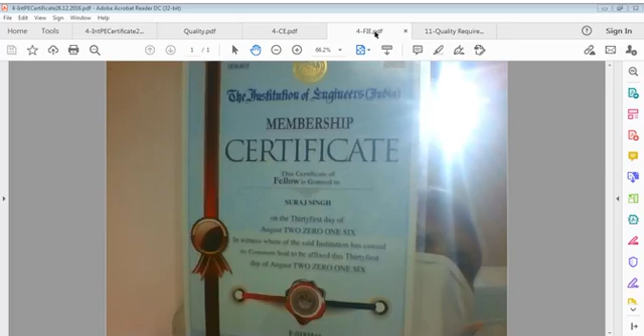So we have to refer again to these certificates, to certifications which are very important. These certificates tell something which you must comply by. You must prove that these certificates are real and not fake. These certificates tell people that this person is competent, but the person must be competent. It's not simply that we have certificates and we are competent. We must prove that we are competent. Proving is important, not just saying all things. If we can't prove, it means we are not that.

That's a very important point. So let's talk quality. Yesterday I was talking about quality, every day I'm talking about quality. It's very important for me. Maybe it's not important for everybody because everybody is not interested in quality - people are interested in quantity, in fact in quantity, not quality. But we should not forget that it's quality that is required everywhere, nothing else.

If quality doesn't work, material doesn't work, product doesn't work, service doesn't work. We may pay whatever to someone for material, for goods, for services, but it doesn't mean the highest price we pay means that is quality material - this is misunderstanding. I can't say that if I pay a high price for some branded product, it means that product is quality. It doesn't mean that at all. And if I pay a lower price, it doesn't mean that product is not of good quality.

It depends. Sometimes if you buy something from a very low class vendor who may sit on the footpath, on the roadside, I think, oh this is a low profile vendor sitting on footpath, what product would he give - it's such a cheap product he is selling, it cannot be a quality product. That equation comes into my mind, but it's not true in every case.

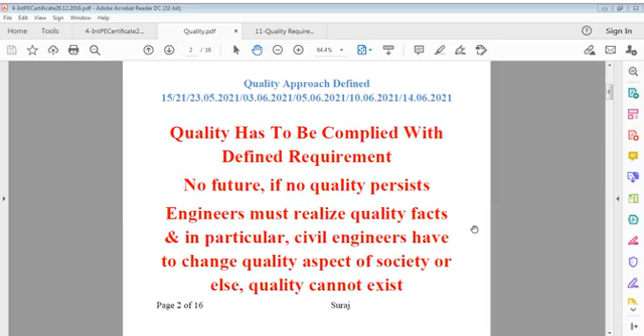And if quality doesn't exist, I can say presence doesn't exist. In fact, existence doesn't mean physical existence, quality existing. I am existing physically, but whether I am living in quality or not living in quality, that I have to see. An engineer has to realize these facts, particularly civil, electrical, mechanical engineers in products everywhere. They must realize the role of quality in our life. It's like a role, quality has a role everywhere. And if quality cannot play its role, we are in the wrong boat. We have to be clear about this.

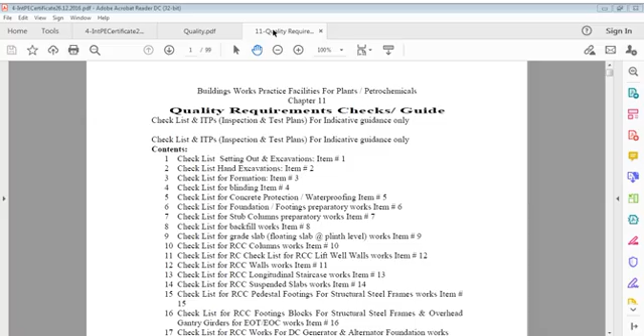So I'm just going back to our talk, and that's why I say I talked about many items, many statements that are used in our life, that are required in our life.

When we start some project, we take care of many things. When we start something, we take care of all items of that. We are taking the example of certain projects, certain imaginary projects, as real projects. What do we think on that?

We start with something when there is nothing. We can say we start with scratch, like we started drawing, we start with scratch. What is that scratch? That scratch is a piece of land. We start with that. There's nothing, just nothing on that. There is only soil, natural stone, unevenness of ground, natural grass, weeds, plants, rubbish. What do we do? We clean all that. We have to prepare that land into a level from where we can start.

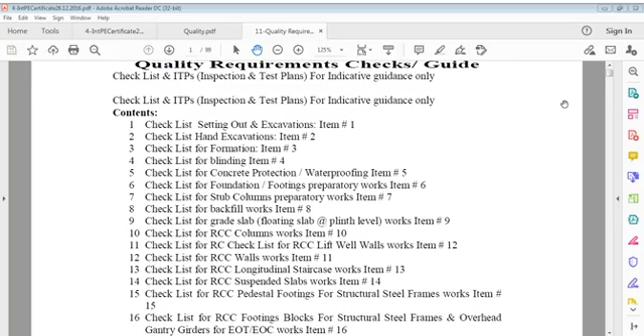And then there are other footings - pedestal footing or machine foundations. These footings are structural members, combined footings, and other types. There are so many types of footings.

Then machine foundations, very important, also used in commercial and industrial buildings. Various types of reciprocating machines, vibratory machines are installed in industries and factories, for which we have to decide what to do. I've given some examples only for generator and alternator foundations.

We have to think of structures which are not going to be plastered or rendered - structural works, structural items, and architectural finishes which do not need any plastering or rendering on them. These are well decorated, attractive finishes.

Then there are different types of slabs used in the Middle East or elsewhere, called Hourdy slab, where the whole slab surface below has no beams, no visible beams or down stands - clear slab without any obstruction. We call it Hourdy blocks based slab.

Then sloping portions of slabs, wherever used, small or big, with a sloping angle located in the slab profile. How to do that, what should be the angle - it can be without double form on the slab, or where top form is also required.

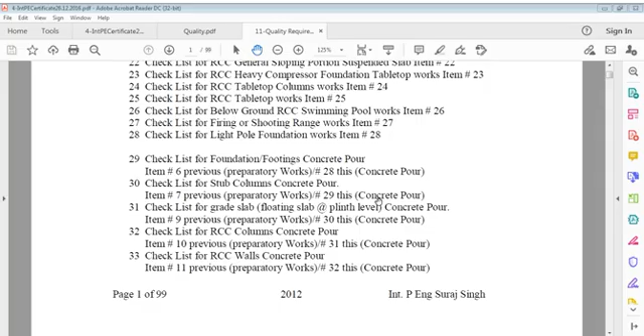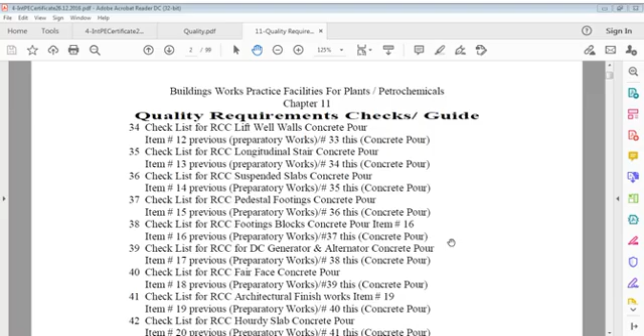So I'm just showing a list, which is very important. In this, I am trying to explain the procedure that goes into all items, one by one. I'm charting more items which are very close to each other, but you can see these are all pouring, pouring, pouring list. Then all items are here in this.

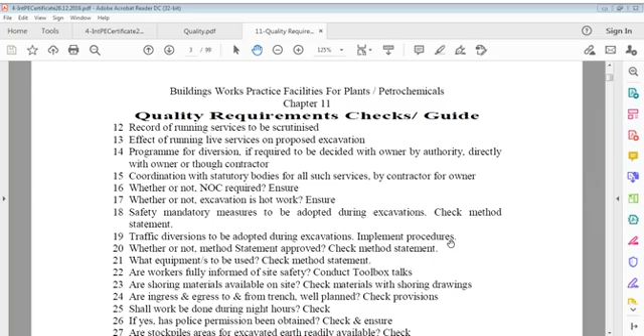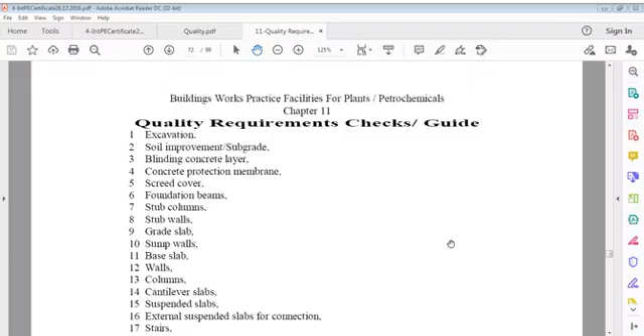Now I'd like to go to some other point - a water reservoir project, which is a different one. I'll show you these sketches as well, which were actually part of some project. I just want to have a word on that.

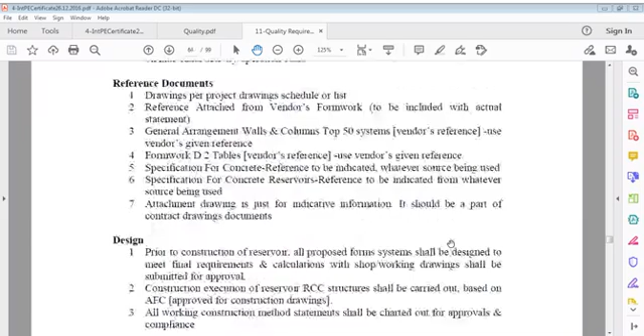That's one water transmission - that's a water reservoir. Actually it is a water reservoir. How can we do that, and what checks are there? It's a kind of method statement, a sample where quality checks are involved. This is definitely a quality requirement, house plan method sketch.

Let's go inside itself, better rather than staying there. So my folder is here, and this is our... I may say... oh yeah, come on. Oh, come on, yeah. Why it's not shifting away? It's a problem here. It's a problem always. Yeah, it's gone now.

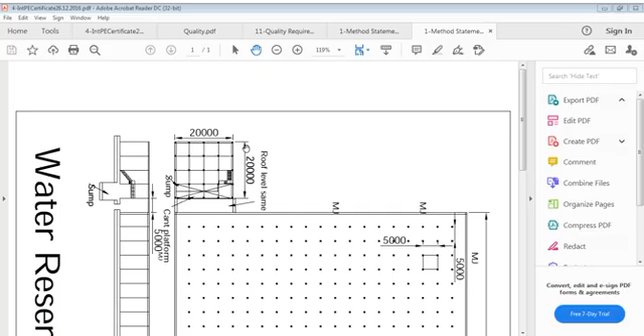Water pumping - no, it's not water pumping, it's something else. It's not that one. Water reservoir, yes, it's here. And it's here as well as here. You'll find this sketch very clear to you. It's here, and the other one should be here as well. Let me see. This two is here, both are here. Now why I'm trying to show this,

nothing to do directly, it is a structure of this building. This is a reservoir, actually designed somewhere. I got some work of tender for this. I'm just trying to indicatively tell you, share with you - it's not my design, first of all, nothing to do with me, I just had to deal with it. I remember this sketch and I'm trying to share this information with you.

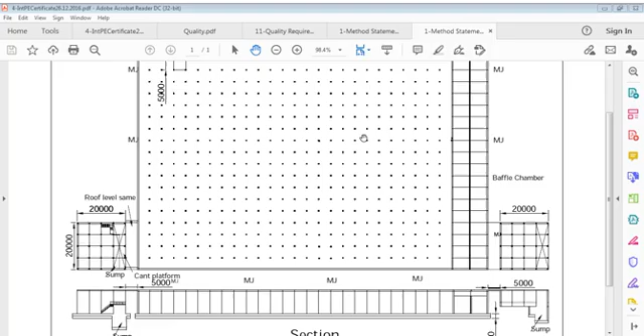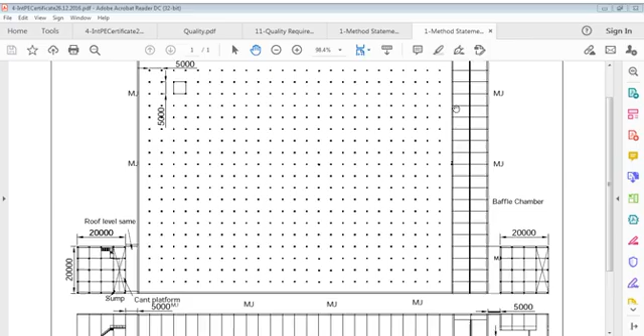Size of this tank - it's a big scheme tank, an element component, a big scheme. Let's say 130 meters and 15 meters here, about 145 meters this way. This is the tank portion, 100 meters wide. This is the tank portion, and here are the baffle walls, baffle chamber. It's quite high, 10 meters deep, and this is the inlet chamber, and this is the outlet chamber.

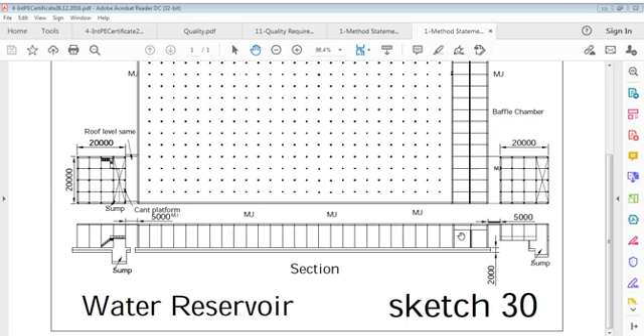This is the outlet chamber, this is the inlet chamber, this is the water reservoir. Very, very indicative sketch, just for information. And also the same was the other one as I showed to you.

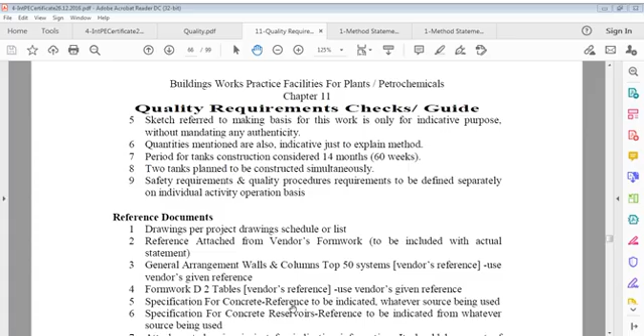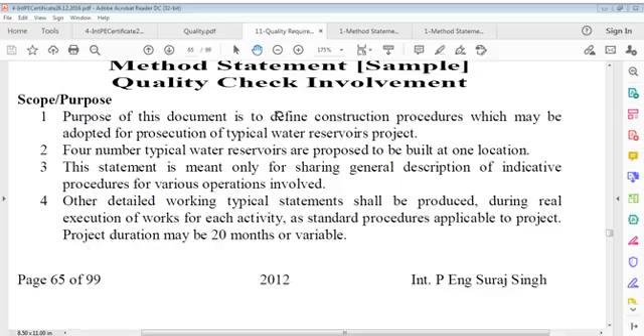Now what I actually want to discuss here - this is part of a transmission scheme, a water transmission scheme. So what does it say, let us look into that one by one. What it means, what it wants to say, that's the important one. It wants to say, it requires something. If you see, the purpose or scope of this writing is - this is the scope of this typical writing.

The purpose of this document is to define construction procedures which may be adopted for prosecution of a typical water reservoirs project - 4 number typical water reservoirs, not 1 number, just keep it. That was only typical, I said. They are going to install 4 such reservoirs.

4 number typical water reservoirs proposed to be built at one location. Size of the location is big - at one place 4, and one place around 150 meters. 4 means 150 meters by 300 meters, by 250, 300 meters by 250. It's quite a big area to cover in this.

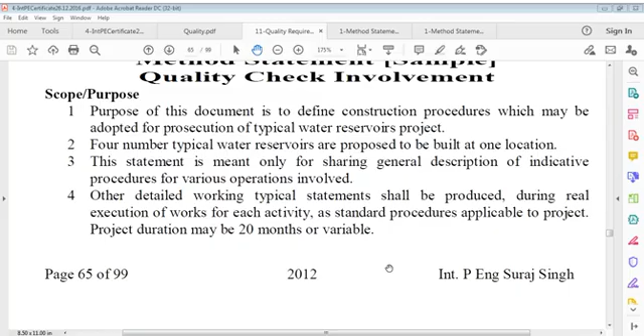This statement is meant only for sharing general description of indicative procedures for various operations involved. Other detailed working typical statements would be produced later during real execution of works for each activity as standard procedures applicable to project duration, which may be 20 months or variable.

This sketch referred to, making basis for this work, is only for indicative purpose without mandating any authenticity. Quantities mentioned are also indicative, just to explain the method.

Now, period for tank construction could be 14 months. 2 tanks planned to be constructed simultaneously. Safety requirements and quality procedure requirements are to be defined separately on individual activity operation basis.

Sometimes what happens when projects are very specialized, while doing your bidding, a question comes: give a method statement or execution statement. We want to know the contractor's competency, the contractor's awareness - what does the contractor, the EPC contractor, understand by this proposal. Is that contractor capable of comprehending this?

We want to ensure by a certain written statement, called a method statement, that it is given indicatively - not a mastered one, but in a way you can understand this, you can do this, meaning you have the capacity to do this. That capacity establishment, that capacity building, is done by inclusion of such documents of this type of statements.

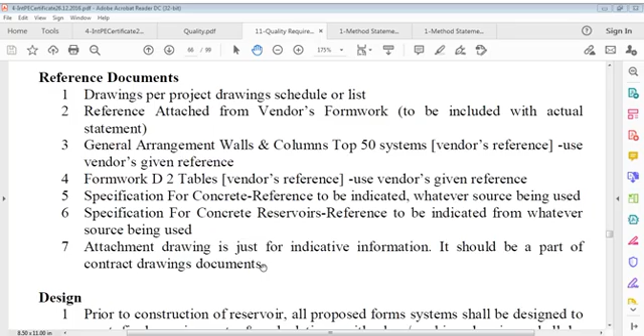Now something about design. Prior to construction of the reservoir, all proposed form systems shall be designed to meet final requirements, and calculations with shop working drawings be submitted for approval. Construction execution of reservoir RCC structures shall be carried out based on approved for construction drawings, abbreviated AFC. All working construction method statements be charted out for approval in compliance.

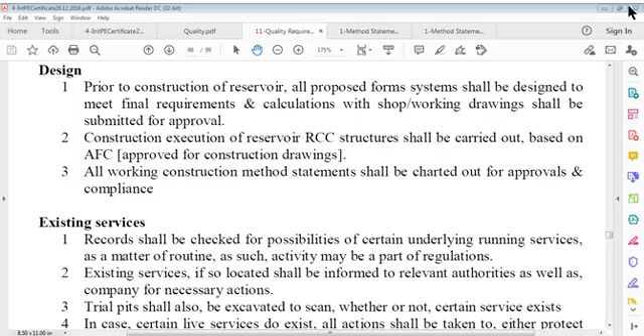Existing services - records shall be checked for possibilities of certain underlying running services as a matter of routine. As such, this activity may be a part of regulations. Existing services, if so located, shall be informed to relevant authorities as well as the company for necessary actions.

Trial pits shall also be excavated to scan whether or not certain services exist. In case certain live services do exist, all actions shall be taken to either protect such service or divert it permanently per authority's direction, or as the case may be, the authority would do it itself if the construction or EPC contract does not include such provisions.

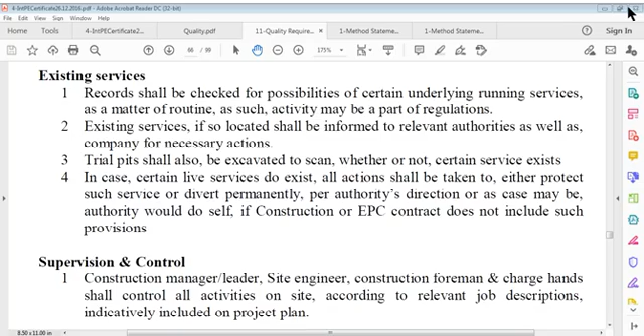Supervision and control. Construction leader, site engineer, construction foreman, and charge hands shall control all activities on site given to them according to relevant job description indicatively included in the project plan. But the construction leader and relevant site engineer are the located officers, the located controllers for all activities.

Since the dimension of the built up main reservoir are given around 130 meters into 100 meters, adequate arrangement shall be made to carry out mass excavation works. All topographical levels shall be recorded for reference to be used in future. Site shall be graded to reach required ground level. All survey documents shall be prepared for purpose of verification.

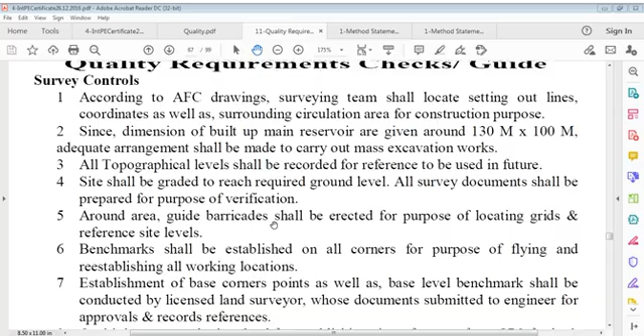Around the area, guide barricades shall be erected for the purpose of locating grids and reference site levels. Benchmarks shall be established on all corners for the purpose of flying and re-establishing all working locations. Establishment of base corner points as well as base level benchmarks shall be conducted by a licensed land surveyor whose documents are submitted to the engineer for approvals and records reference, or a third party may be involved for establishing site references from GPS, for both horizontal and vertical controls.

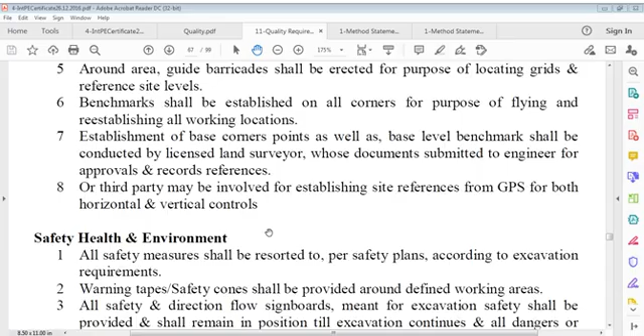Safety, Health and Environment (SHE). All safety measures shall be resorted to per the safety plan, according to excavation's requirements.

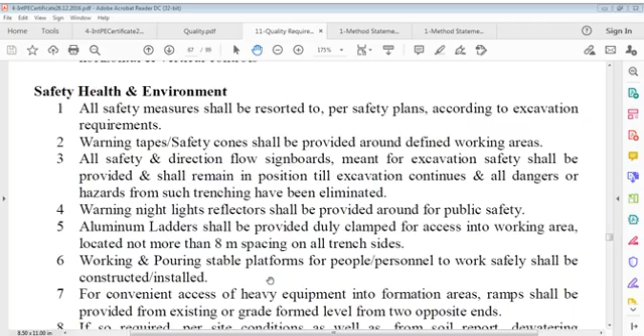Warning tapes and safety cones shall be provided around defined working areas. All safety and direction flow signboards meant for excavation safety shall be provided and remain in position till excavation continues, until all dangers or hazards from such trenching have been eliminated. Warning lights, warning night lights, and reflectors shall be provided around for public safety.

Aluminum ladders shall be provided, duly clamped for access into working areas, located not more than 8 meters spacing on all trench sides. Working and pouring stable platforms for personnel to work safely shall be constructed and installed. For convenient access of heavy equipment into formation areas, ramps shall be provided from existing or grade formed level from two opposite ends, if so required per site conditions, as well as from soil report.

Dewatering arrangements shall be carried out continuously until construction reaches roof slab level, or retaining walls and baffle walls have been constructed. Toolbox talks shall be imparted daily for all important operations involved. A safety officer shall inspect works every day during all concreting activities, form erection activities, and all traffic movement activities, etc.

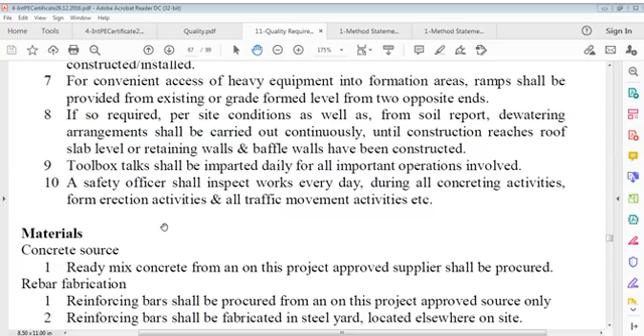Materials. Concrete source: ready-mix concrete. Ready-mix concrete from an approved supplier on this project shall be procured.

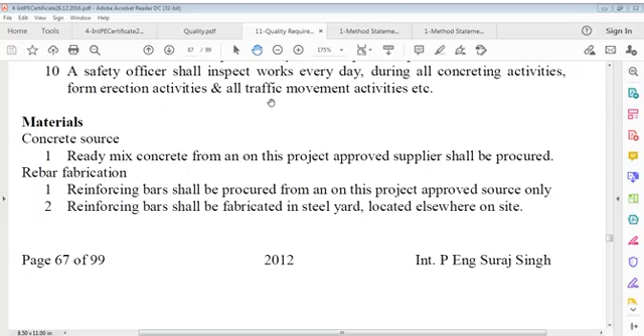Reinforcing bars shall be procured from an approved source only on this project. Reinforcing bars shall be fabricated in a steel yard located elsewhere on site. If on-site steel yard installation is acceptable, it shall be included on the site establishment plan and duly approved. All fabricated bars shall be tagged according to BBS, the bar bending schedule references.

All fabricated, cut, or bent bars shall be stored, duly tagged and covered properly so as not to permit any moisture ingress on rebar surfaces. No rebar shall be placed on soil, but adequate off-ground safe platforms shall be constructed for storage.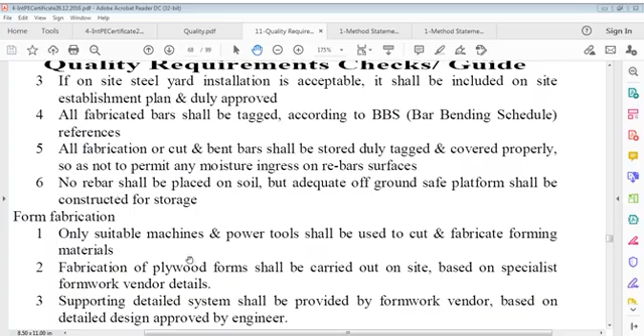Form fabrication. Only suitable machines and power tools shall be used to cut and fabricate forming materials. Fabrication of plywood forms shall be carried out on site based on specialist formwork vendor details. The supporting detail system shall be provided by the formwork vendor based on detailed design approved by the engineer. On-site formworks shall be erected according to and complying with the vendor's drawings.

Scope of vendor formwork system. The scope of the vendor formwork system shall be confined to retaining walls, baffle walls, columns, and flat slabs.

Procedure method for one reservoir construction. We are giving here one reservoir; there are four reservoirs, so we cannot give the same thing four times. So, summary of pre-RCC structural preparation activities for one unit set of reservoir.

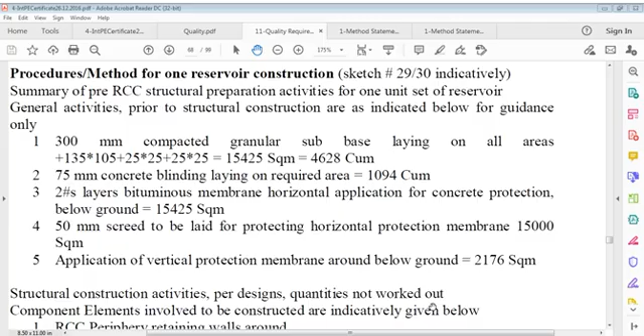General activities prior to structural construction are as indicated below for guidance only: 300mm compacted granular subbase laying on all areas. Which areas? 135 by 105 meter, 25 by 25 meter, another 25 by 25 meter, which all come to 15,425 square meters, or when you take 0.3 meter thickness, it becomes 4,628 cubic meters.

75mm concrete blinding laying on the required area, which is around 1,094 cubic meters. Second, two number layers of bituminous membrane horizontal application for concrete protection below ground, that is 15,425 square meters. 50mm screed to be laid for protecting the horizontal protection membrane, which is 15,000 square meters.

And we can say, application of vertical protection. We can say here also, 50mm screed to be laid for protecting the horizontal protection membrane, which is 15,000 square meters. Application for vertical protection membrane around below ground, which is 2,176 square meters.

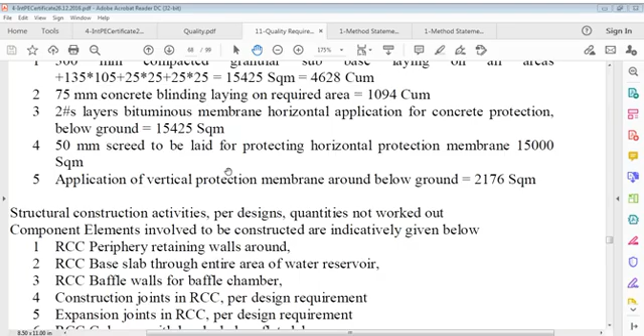Structural construction activities. Structural construction activities for design quantities not worked out; the component elements involved to be constructed are indicatively given below.

One is RCC periphery retaining walls around, of course these are 10 meters high, RCC periphery retaining walls around. RCC base slab through the entire area of the water reservoir. RCC baffle walls for baffle chamber. Construction joints in RCC for design requirements. Expansion joints in RCC for design requirements.

Then RCC columns with heads below flat slab. RCC suspended slab throughout. All components pertaining to adjacent inlet and outlet chambers. Components of overflow chambers.

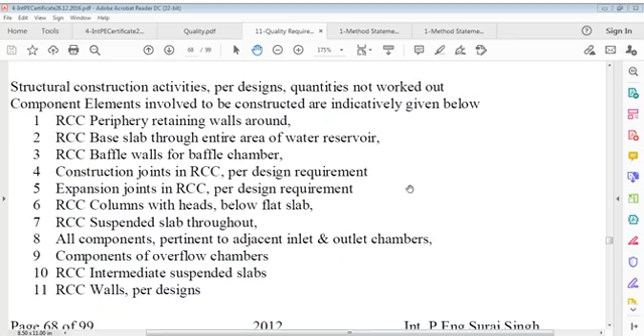All components pertaining to adjacent inlet and outlet chambers, components of overflow chambers, RCC intermediate suspended slabs, RCC walls per designs - these are elements. RCC sump pit elements per designs, box outs wherever required or indicated, stair structure as indicated on drawing, whether RCC or structural steel, RCC roof of stands, above ground concrete protection around.

General activities post structural construction: filling PVC pipe inserts within walls with approved proprietary material, fixing of manhole covers and frames on reservoir roof, roofing and waterproofing per standard approved system, roof handrails around over upstands per details, external walls pattern formation, 1200 mm wide interlocking paving around reservoir construction.

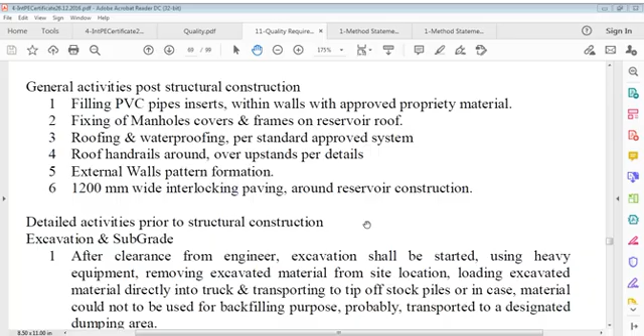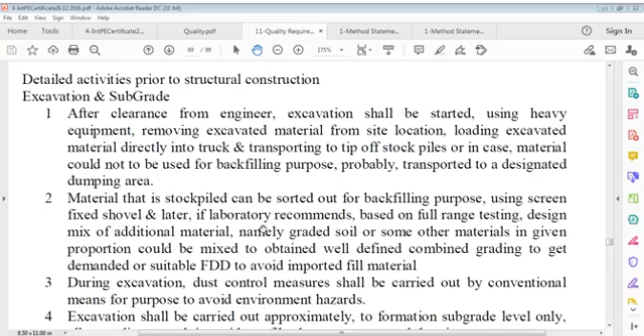Detailed activities prior to structural construction: excavation and subgrade. After clearance from engineer, excavation shall be started using heavy equipment, removing excavated material from site location, loading excavated material directly into truck and transporting to tip-off stockpiles, or in case material could not be used for backfilling purpose, probably transported to a designated dumping area.

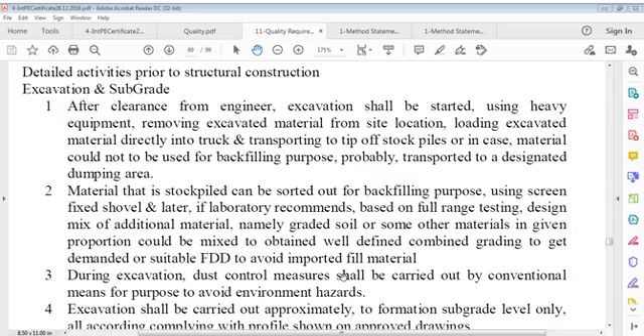After clearance from engineer, excavation shall be started using heavy equipment, removing excavated material from site location, loading excavated material directly into truck and transporting to tip-off stockpiles, or in case material could not be used for backfilling purpose, probably transported to a designated dumping area.

Material that is stockpiled can be sorted out for backfilling purpose using screen fixed shovel, and later, if laboratory recommends based on full range testing, design mix of additional material, namely graded soil or some other material in given proportion, could be mixed to obtain well defined combined grading to get demanded or suitable FDD to avoid imported fill material. During excavation, dust control measures shall be carried out or applied by conventional means to avoid environment hazards.

Excavation shall be carried out approximately to formation subgrade level only, all complying with profile shown on approved drawings. Land surveyor shall continuously control levels so as to avoid over excavation.

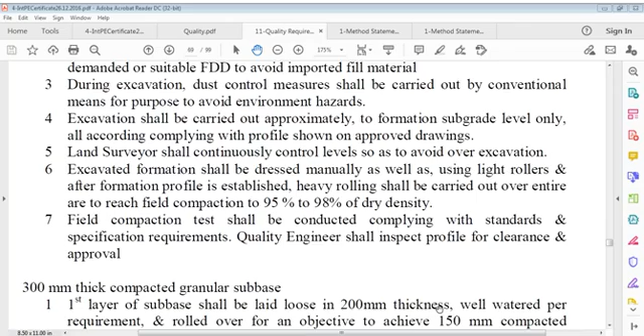300 thick compacted granular subbase. First layer of subbase shall be laid loose in 200 thickness, well watered per requirements and rolled over for an objective to achieve 150 compacted thickness.

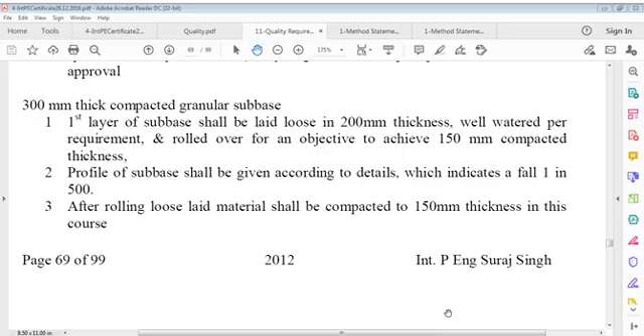Profile of subbase shall be given according to details which indicates a fall in 1 in 500. After rolling, loose laid material shall be compacted to 150 thickness in this course. Site FDD, field density, field dry density testing shall be conducted from this layer in conformance to specification requirement for granular subbase spread over entire area.

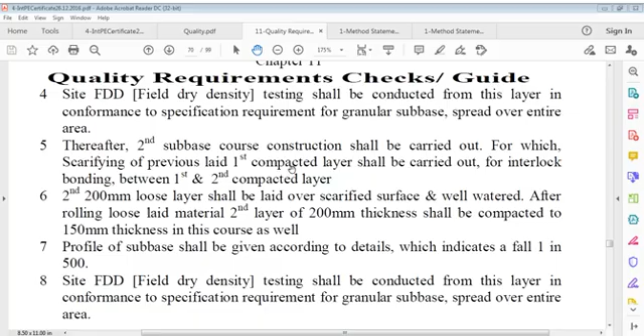Thereafter, second subbase course construction shall be carried out, for which scarifying of previous laid first compacted layer shall be carried out for interlocking bonding between first and second compacted layer. Second 200 loose shall be laid over scarified surface and well watered. After rolling, loose laid material second layer of 200 thickness shall be compacted to 150 thickness in this course as well.

Profile of subbase shall be given according to details which indicates a fall in 1 in 500. Site FDD testing shall be conducted from this layer in conformance to specification requirement for granular subbase spread over entire area.

75 thick concrete blinding and mass concrete to requirement. Blinding shall be done in stages parallel to width of reservoir.

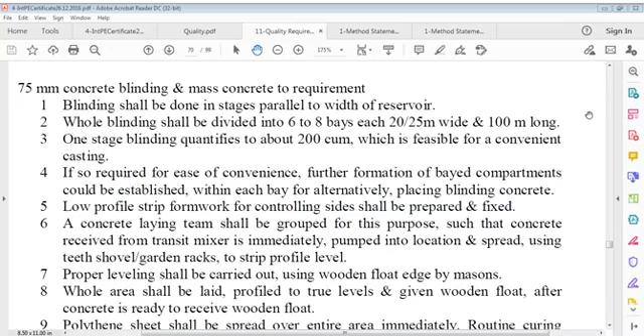Whole blinding shall be divided into 6 to 8 bays, each 20 or 25 meter wide and 100 meter long. One stage blinding quantifies to about 200 cubic meter, which is feasible for a convenient casting. If required for ease of convenience, further formation of bayed compartments could be established within each bay for alternatively placing blinding concrete. Low profile strip formwork for controlling sides shall be prepared and fixed.

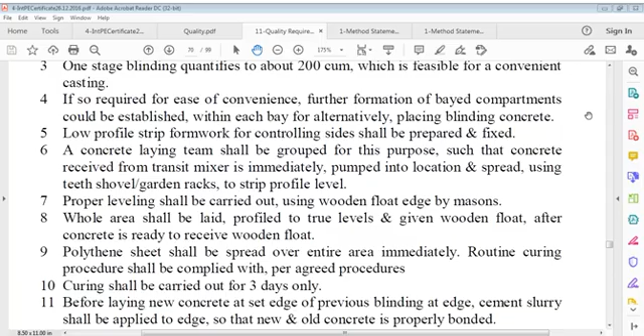A concrete laying team shall be grouped for this purpose, such that concrete received from transit mixer is immediately pumped into location and spread using teeth shovel. Proper leveling shall be carried out using wooden float edged by masons. Whole area shall be laid to profile to level and given wooden float after concrete is ready to receive wooden float.

Polythene sheet shall be spread over entire area immediately. Routine curing procedure shall be complied with per agreed procedures. Curing shall be carried out for 3 days only. Before laying new concrete at set edge of previous blinding at edge, cement slurry shall be applied to edge so that new and old concrete is properly bonded.

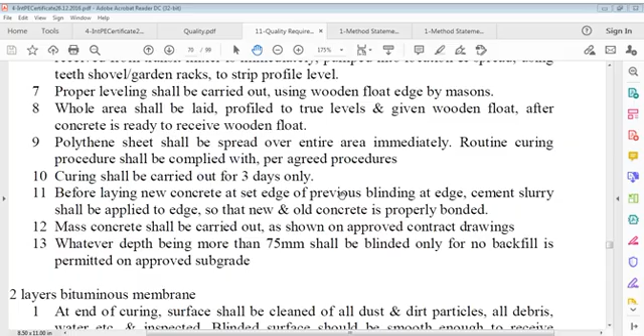Mass concrete shall be carried out as shown on approved contract drawing. Whatever depth being more than 75 shall be blinded only, for no backfill is permitted on approved subgrade. Two-layer bituminous membrane.

At end of curing, surface shall be cleaned of all dust, dirt particles, debris, and water, then inspected. Blinded surface should be smooth enough to receive bituminous membrane application. All cracks appearing on damaged portions, wherever located, shall be repaired either by grouting or by breaking and relaying concrete.

According to manufacturer's instruction, bituminous membrane shall be applied over blinded surface in both sheet applications, with a 50 mm thick screed for membrane protection. Membrane shall be protected by an application of 50 mm thick screed layer as soon as possible and cured accordingly, by repetition of the foregoing activities in sequence but in alternate bays.

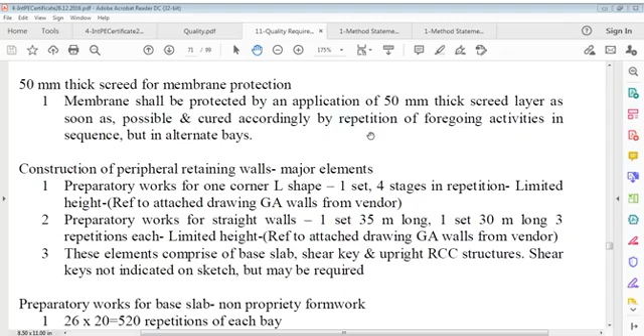Construction of peripheral retaining walls, major elements. Preparatory works for one corner L-shape, one set, 4 stages in repetition, limited height, refer to attached drawing GA walls from vendor. Preparatory works for straight wall: 1 set 35 meters long, 1 set 30 meters long, 3 repetitions each, limited height. These elements comprise base slab, shear key and upright RCC structures. Shear key is not indicated on sketch but may be required.

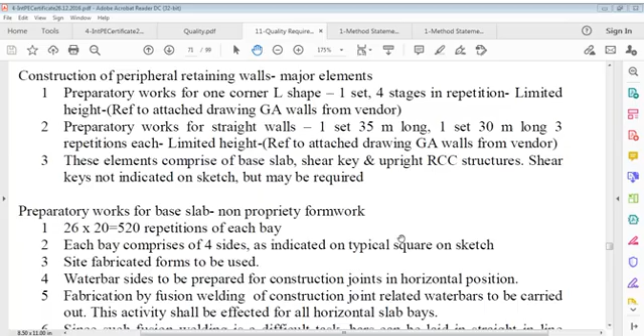Preparatory works for base slab, non-proprietary formwork. 26 by 20 is 520 repetitions of each bay. Each bay comprises of 4 sides as indicated on typical square on sketch. Site fabricated forms to be used.

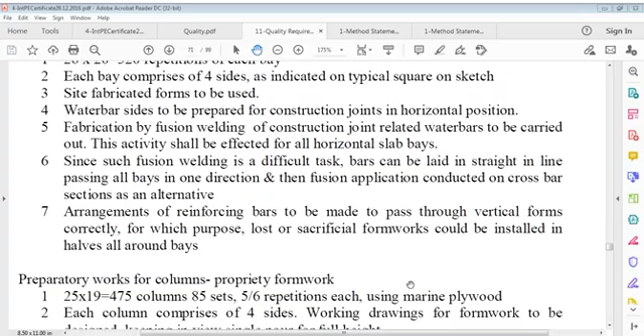Preparatory works for columns, proprietary formwork.

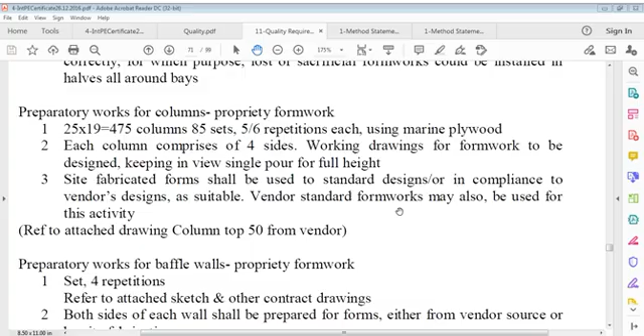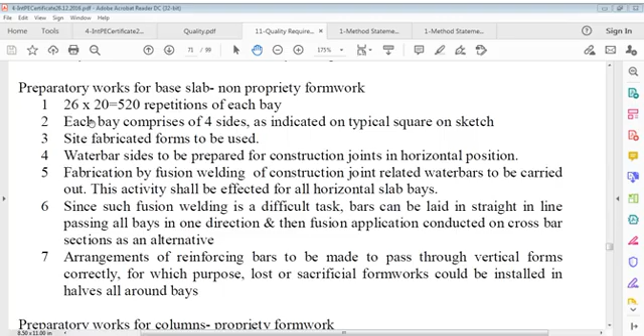As explained earlier for this column base slab, these four sides as reflected here, you have to provide water bars, and these water bars can continue like this, and this can be done crosswise as well.

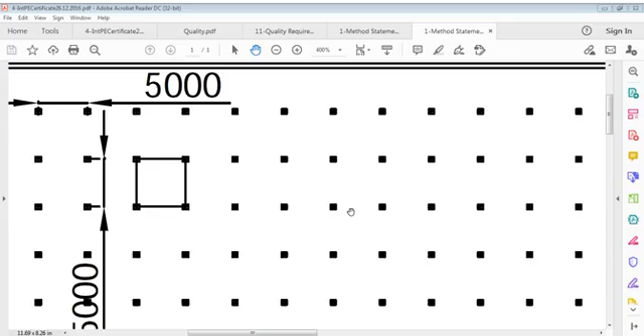There can be a permanent vertical form here, through which half above and half below this base concrete can go in. These are individual, alternative bases; you can pour according to that system. This is the most important point: we can continue like this, it's up to you. If you want to make it separately, you can make it separately, or make it straight and then weld crosswise. It depends on your working conditions.

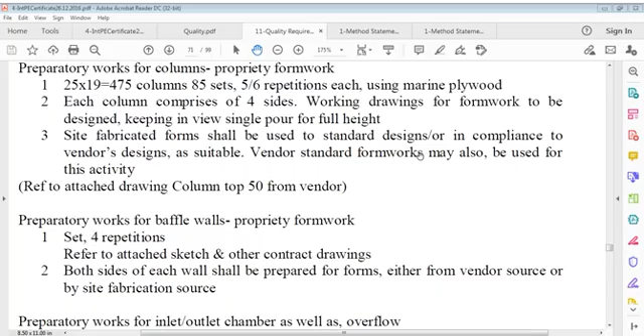Now we are talking of columns. I have 85 sets of column for 475 columns, costing 5 to 6 repetitions each, using marine plywood. Each column comprises of 4 sides, of course a minimum of 4. Working drawings for formwork to be designed, keeping in view single pour for full height. Site fabricated forms shall be used to standard designs or in compliance with vendors' designs as suitable. Vendor standard formworks may also be used for this activity.

Preparatory works for baffle walls, proprietary formwork, 4 repetitions, refer to attached sketch. Both sides of each wall shall be prepared for forms either from vendor source or by site fabrication source.

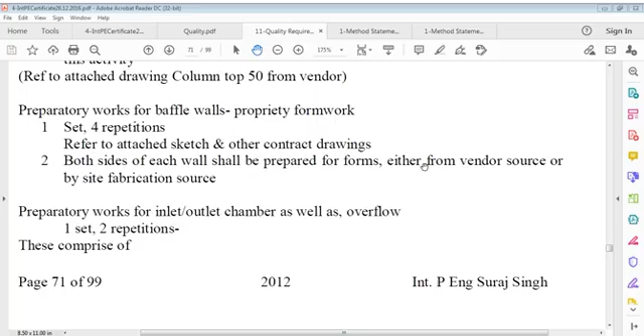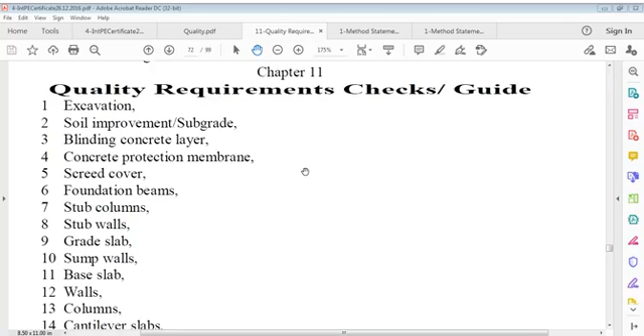Preparatory works for inlet outlet chamber as well as overflow, one set, 2 repetitions. This comprises of many activities. Now that's an important list here: inlet and outlet chambers, there are 2 chambers, one inlet and one outlet.

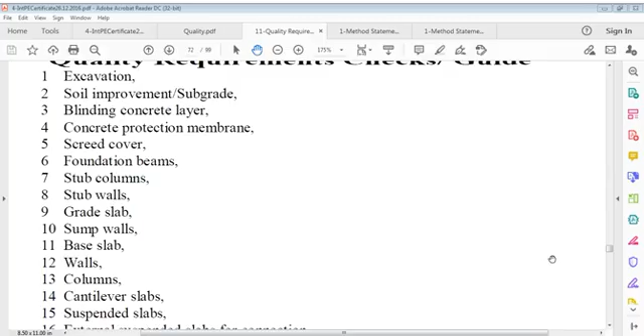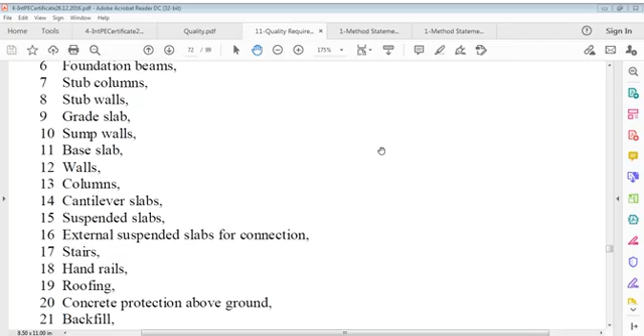Activities included are: excavation, soil improvement or subgrade, blinding concrete layer, concrete protection membrane, screed cover, foundation beams, stub columns, stub walls, grade slab, sump walls, base slab, walls, columns, cantilever slabs, suspended slabs, external suspended slabs for connection, stairs, handrails, roofing, concrete protection above ground, backfill, external paving, etc.

I repeat: excavation, soil improvements, subgrade, blinding concrete layer, concrete protection membrane, screed cover, foundation beams, stub columns, stub walls, grade slab, sump walls, base slab, walls, columns, cantilever slabs, suspended slabs, external suspended slabs for connection, stairs, handrails, roofing, concrete protection above ground, backfill, external paving, etc.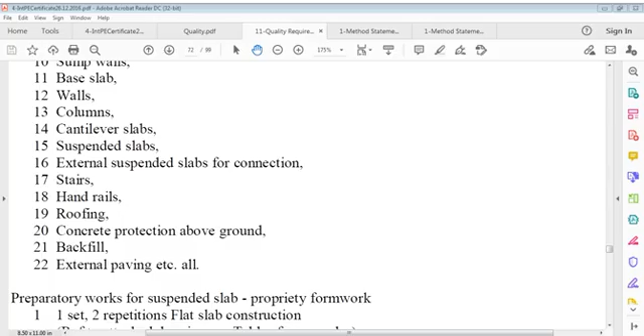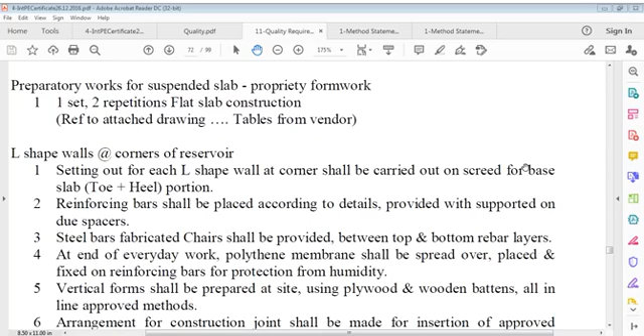Preparatory works for suspended slab, proprietary formwork, one set, two repetitions, flat slab construction. This is a very important point here that we cannot complete today.

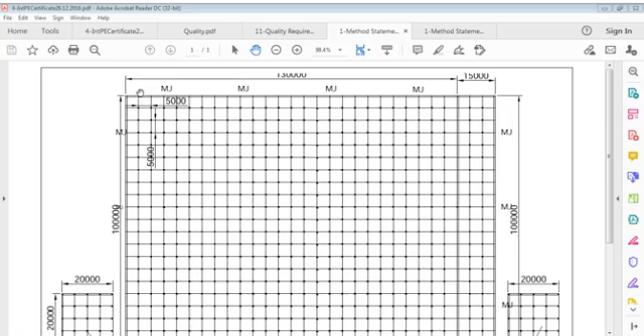Setting out for each L-shaped wall at corner shall be carried out on screed for base slab, at the toe and heel portion of retaining wall.

Reinforcing bars shall be placed according to details provided, supported on due spacers. Steel bars fabricated chairs to be provided between top and bottom rebar layers. At end of everyday work, polythene membrane shall be spread over, placed and fixed on reinforcing bars for protection from humidity.

Vertical forms shall be prepared at site using plywood and wooden battens, in line with approved methods. Arrangement for construction joint shall be made for insertion of approved water bar so that the lower half of the bar is inserted in retaining walls base slab concrete. Retaining wall base slab shall run continuous without forming any construction joint.

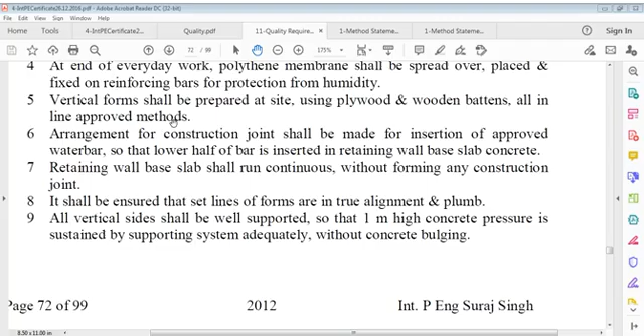It shall be ensured that set lines of forms are in true alignment and plumb. All vertical sides shall be very well supported so that one meter high concrete pressure is sustained by the supporting system adequately without concrete bulging.

After clearance by site engineer, QC inspection shall be conducted and engineer's approval obtained for pouring concrete.

About 600 cubic meters of pour in this program that may take about 16 hours. Pouring shall be done in 3 layers so that cold joints are avoided. Two concrete mobile pumps shall be used for conducting this pour. Concrete delivery shall be maintained continuous.

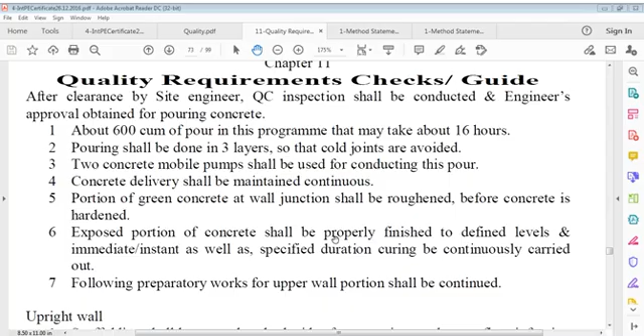Portion of green concrete at wall junction shall be roughened before concrete is hardened. Exposed portion of concrete shall be properly finished to defined levels, and immediate instant as well as specified duration curing be continuously carried out. Following preparatory works for upper wall portions shall be continued.

Upright walls. Scaffolding shall be erected on both sides for accessing workers to fix reinforcing bars and erect formworks for upright wall. Reinforcing bars shall be placed properly in compliance with design details and engineer's approval obtained prior to closure of forms. At end of everyday work, polythene membrane shall be spread over, placed and fixed on reinforcing bars for protection from humidity.

According to formwork vendors' designs, sides of forms shall be erected and fixed. It shall be ensured that erected forms are in true alignment and plumb, as well as outer wall forms comply true to design profile. Anchoring arrangements sleeved in for wall tie bolts shall be fastened properly.

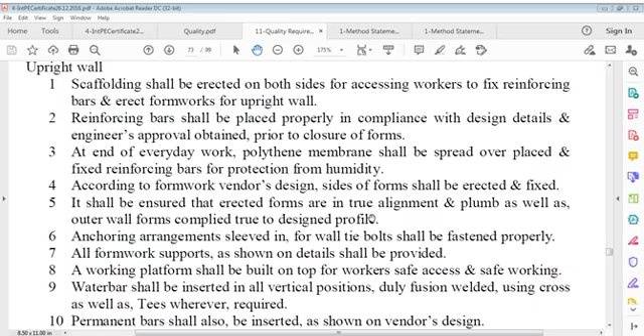All formwork supports as shown on details shall be provided. A working platform shall be built on top for workers' safe access and safe working. Water bar shall be inserted in all vertical positions, duly fusion welded using crosses as well as T's wherever required. Permanent bars shall also be inserted as shown on vendor's design.

Outer forms shall be checked for correctness of related compliance with design profile, while vertical forms checked for verticality as well as alignment. QC inspection shall be conducted and engineer's approval obtained.

Program shall be charted out for pouring about 250 cubic meters in one go. Concrete pouring chute pipes shall be inserted vertically into prepared works so that net drop of concrete is not more than 1.5 meters to 2 meters.

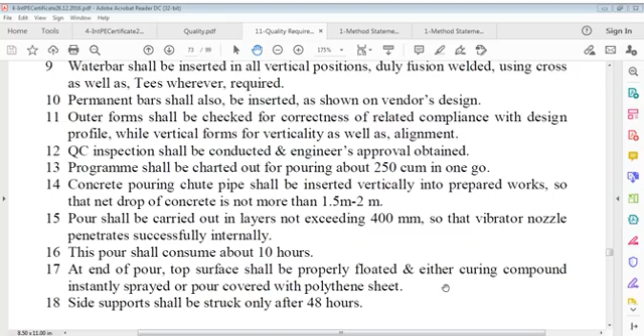Pour shall be carried out in layers not exceeding 400 mm so that the vibrator nozzle penetrates successfully internally. This pour shall consume about 10 hours, and at end of pour the top surface shall be properly floated and either curing compound instantly sprayed or pour covered with polythene sheet. Side support shall be struck only after 48 hours.